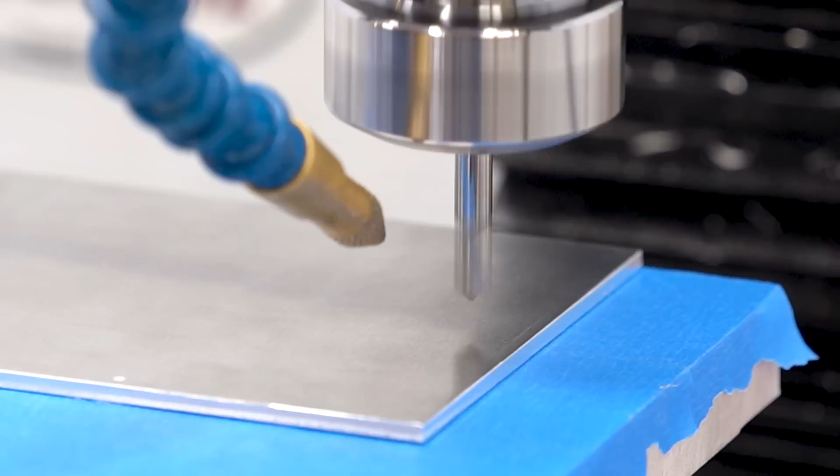This video is part of my series on putting a new spindle on my Grizzly G0704 mill. I think we're through most of the yak shaving. The spindle is running, it's time to make parts.

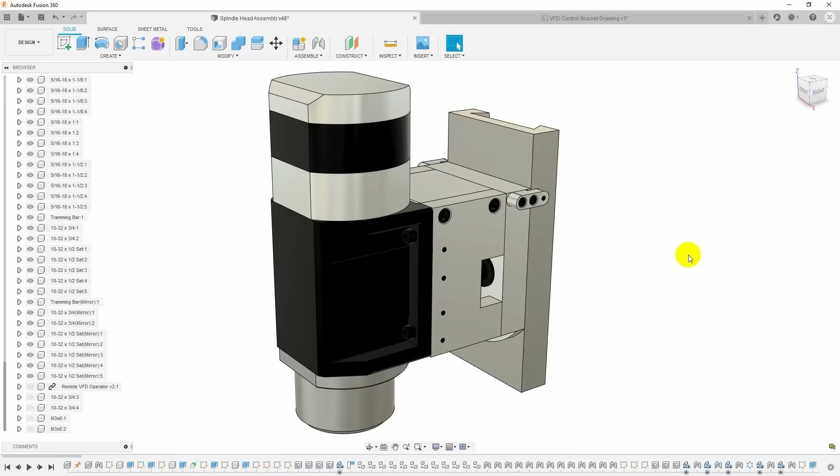Today I think we're going to start by making a bracket so that I can mount the remote VFD operator actually on the spindle instead of where it is right now, tucked under the handle of my toolbox. Now you've of course seen this model before. This is the new 3 horsepower spindle for the Grizzly mill and the mount that I machined to mount it onto the Z slide.

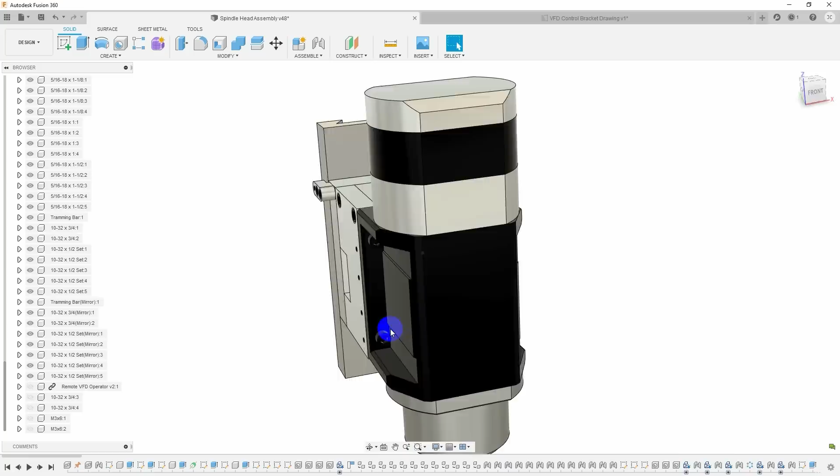You'll remember that I put some holes in the side here. In addition to the holes for the tramming bars, I just put 4 10-32 holes in each side of the mount, and I said that was for attaching things. Today we're going to make one of the things that attaches there.

Now the bottom screws I intend for attaching coolant mister attachments, because this isn't steel so we can't use a magnet, it's aluminum. But the top two I want to use to mount the operator for the VFD. So I've got that modeled.

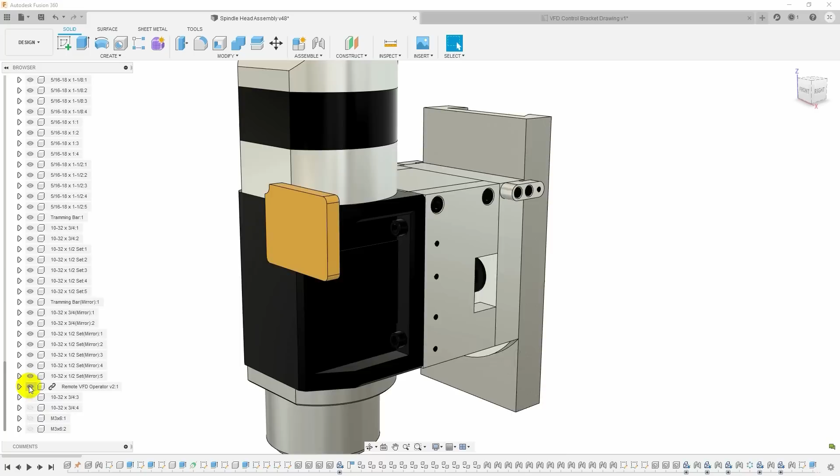It's not yellow, but I've got it yellow here so it's easy to see. This is about where I want it to sit. I want it to be on the front of the spindle where I can see it clearly. I could display the spindle load, or I have the start and stop buttons. I'll have the knob to control the speed if I'm doing it manually.

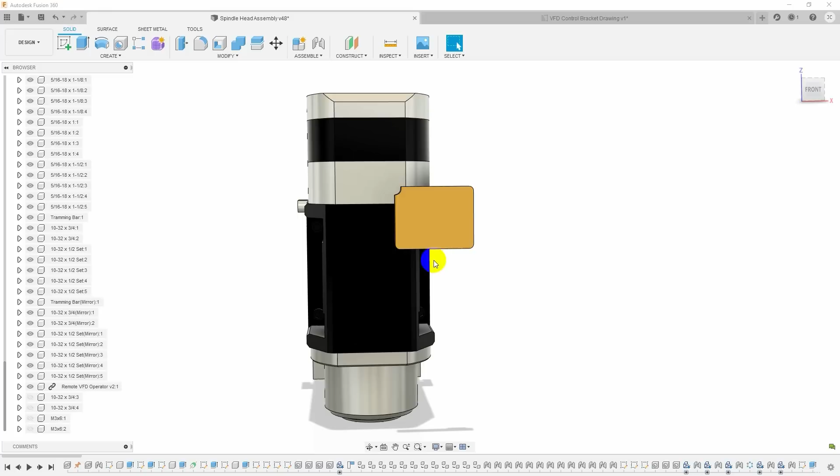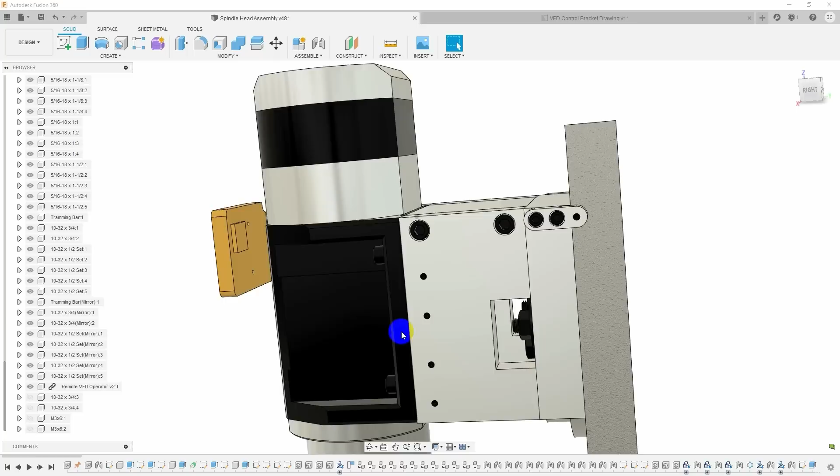So what I want to do is make a sheet metal bracket, and I've got that modeled in here. It's not going to be red, it's going to be aluminum, but again I've got this colored so that you can see it easily.

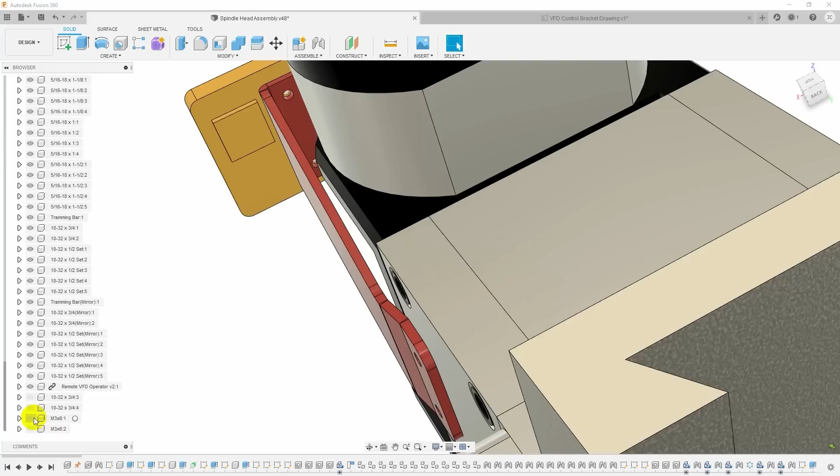So it's going to attach to the 2 screws here on the side, come forward, and then attach with a couple of M3 screws to the pre-existing holes in the back of the operator so that it can be mounted there. And down here, these are 10-32s.

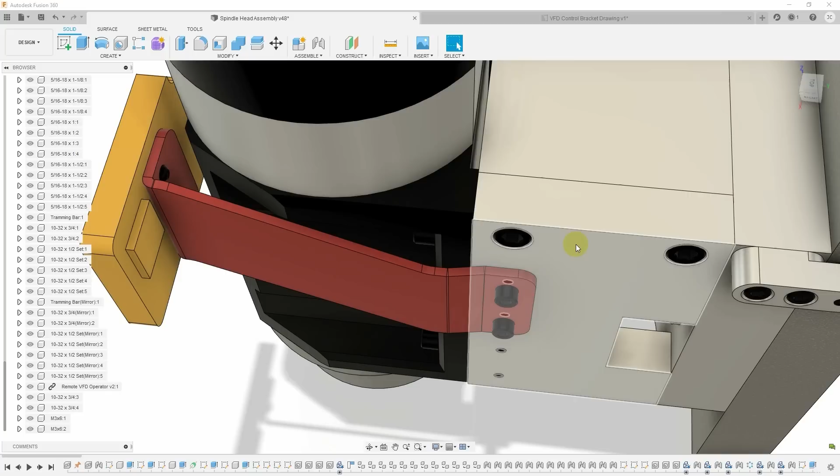So I modeled this up in Fusion as a sheet metal part. I'm not going to go into the details of that right now. If that's something you'd really like to see, how to model sheet metal parts in Fusion, let me know in the comments and I can take a look at that.

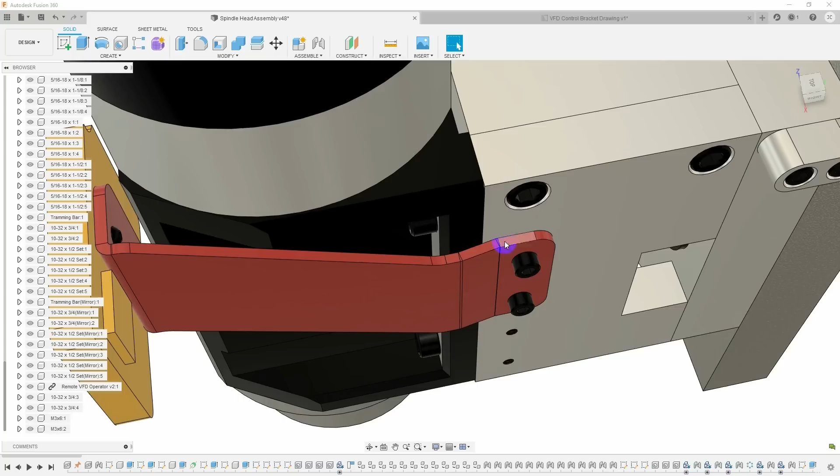But when you model this as a flange and then add on, here's a flange that comes outward at 10 degrees, and that's because there's a little bit of misalignment. The spindle is slightly wider than the back plate, so there's a little step there. So I put a little jog, came out 10 degrees, then bent back 10 degrees, came forward, and then bent 90 degrees. So in Fusion, you can just model it that way as a sheet metal part.

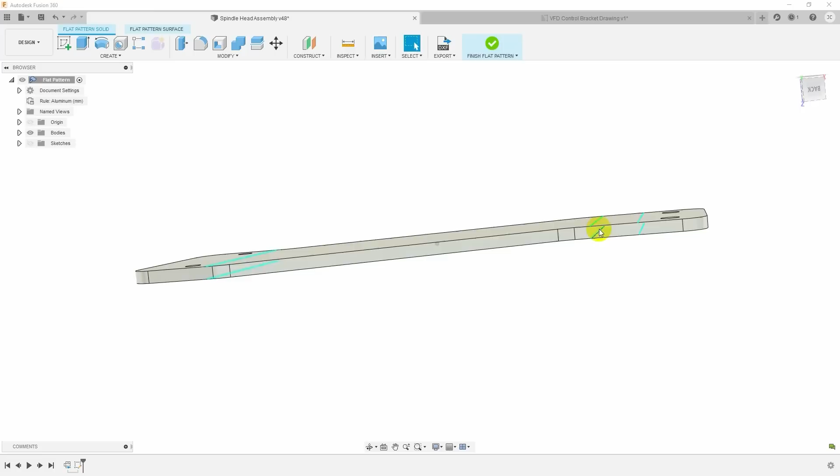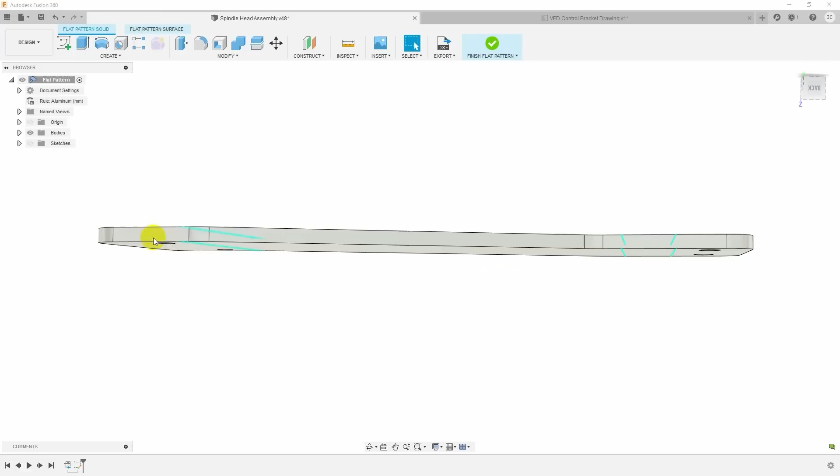And then you can come up here to your flat pattern, activate it, and look at a flat pattern of the part. It has a rule for the material you're using that has information about the bend radius and the way the material flows when you form it. So it can figure out what size the part needs to be and where the fold lines are so that you'll get the outcome you actually modeled. Sometimes you have to tune that, but in general for stuff like this that's not real fit-critical, the defaults are just fine. This is a 1/8 inch thick material, and we're just going to mill this out of a piece of sheet aluminum and then bend it.

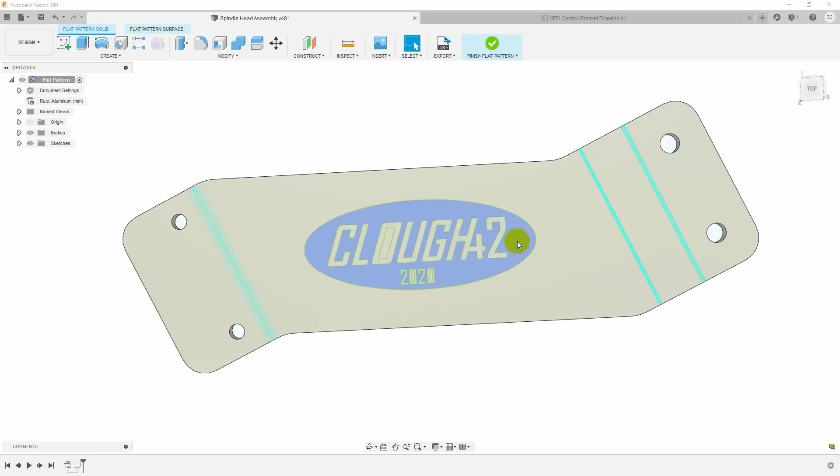As long as we're going to have this thing flat down in the mill so that we can mill around it, we might as well throw a sketch on here and engrave a logo on the side. This probably exceeds what you would consider a maker's mark or a touch mark, but this should be fun. We can try out the high-speed engraving and see how that goes with the new spindle as well.

So I think we just need to go out to the mill, slap a piece of sheet metal on it, and give it a try. Nothing left to do but to do it.

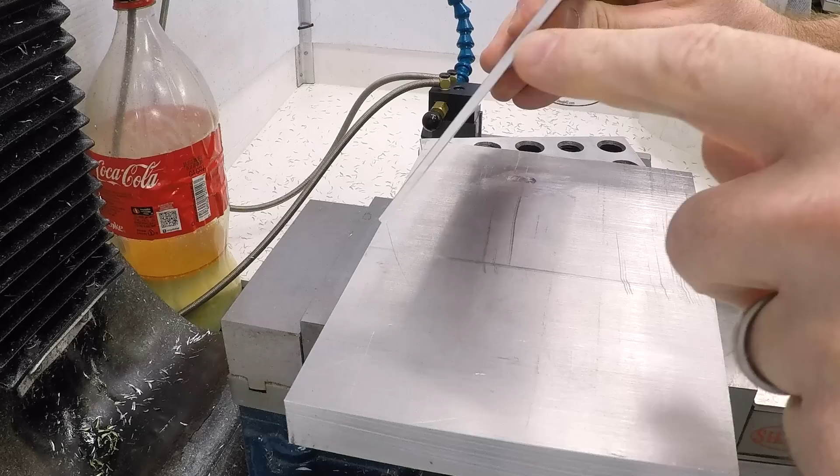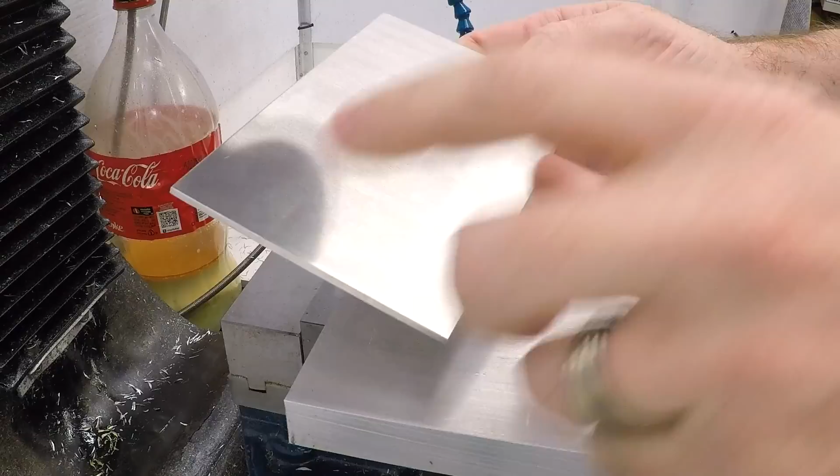This is the material we're going to use for the bracket. This is 1/8 inch thick 5052 aluminum. Normally on milling projects I'm using 6061, which is what this block in my vise is. But for the bracket I'm going to use 5052, because I need to be able to bend it.

6061, especially in this thickness and in a T6 temper, tends to crack or break when you bend it. 5052 actually bends a lot easier, so that's what we're going to use.

Now the downside of 5052 is that it tends to be very gummy when machining, and I've actually run into a bunch of trouble trying to make brackets out of this material.

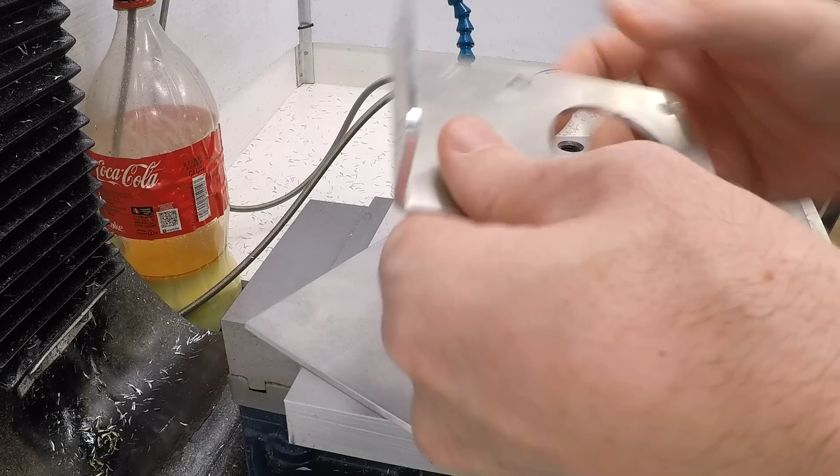This is a bracket I made that you may have seen on Instagram — I uploaded some photos when I made it. This is for mounting a fog buster on this machine, made using the same process I'm going to show here today, milling it out. But this 5052 is really gummy. Even using my favorite YG1 aluminum end mills, I had to take it in 4 depths of cut, because going deeper would just gum up and chip weld onto the cutter.

So we're going to take this nice and easy. Of course we have a much higher speed spindle, so it'll take less time to do multiple depths. But honestly I have no idea if the higher speed will make the gumming and chip welding worse or better. It's also a coated end mill from Lakeshore Carbide, so we'll see how that goes.

To hang on to this, I'm going to use super glue. There's not really a good way to clamp it, since I have to slot out around the bracket. I could try to grip it with the Talon jaws, but since I'm cutting completely through the part, there will be nothing left to grip unless I leave tabs — and with vise pressure on it, I'd need really big tabs to make that work. So I think super glue is the best way to go here.

So I'll lay down blue painter's tape on the part, then super glue the two together. This is something John Saunders showed over on NYC CNC a long time ago, and I've used it a handful of times and it works really well. Of course, you have to be able to peel your tape.

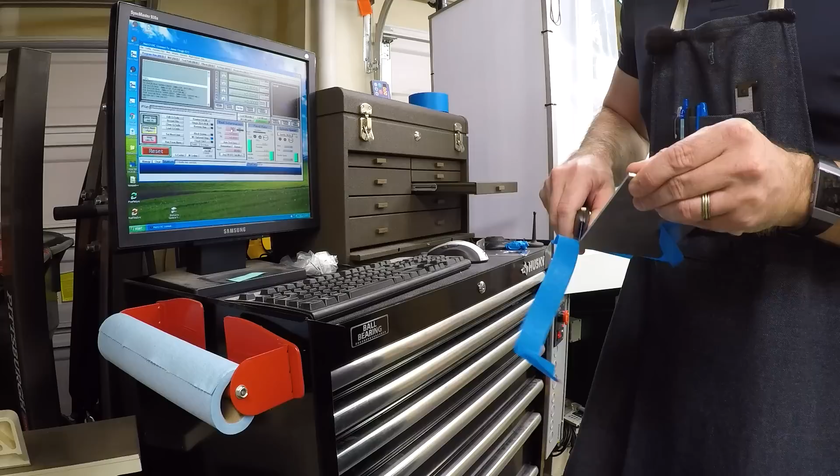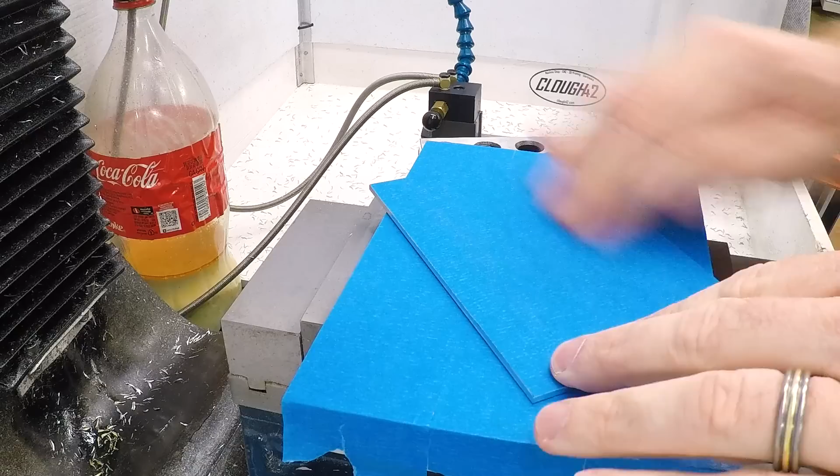Make sure this is burnished down good and tight. Then we'll stick this down with super glue right about the back edge of the vise, just to try to make sure we keep the part within the work envelope of this mill.

Now I'm using Loctite 414, just because it's worked well for me in the past, and because it's a little bit thicker than some of the other formulations I use for other jobs, like 420.

That should be plenty — I've never really had a problem with not getting enough. I always have too much, that's my problem.

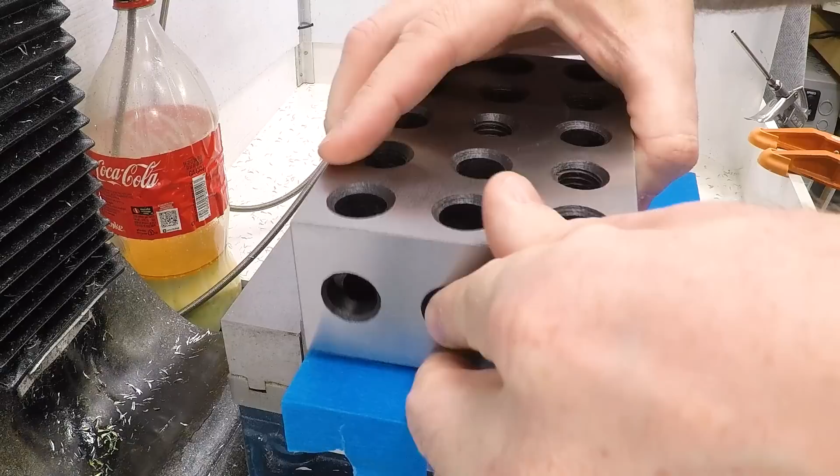Clamp that with a 246 block. And I've actually got a couple of Woodpeckers clamps here just to make sure this is nice and secure.

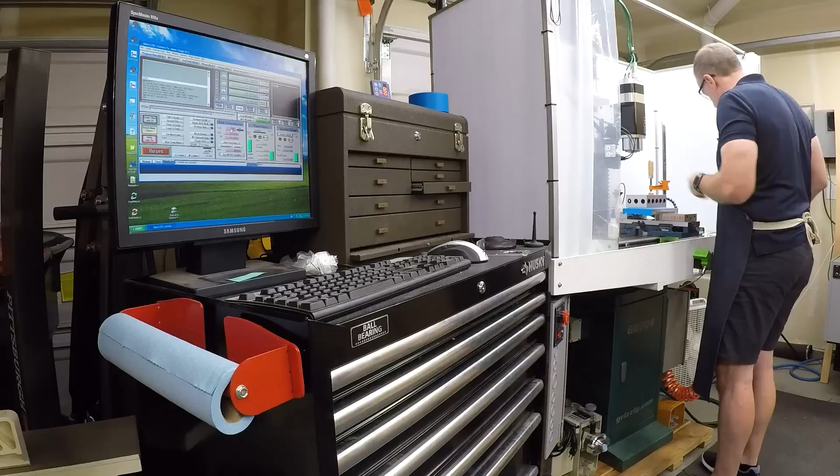We'll let that sit for a few minutes to make sure the super glue has grabbed. Okay, the glue has set and this is nice and solid. So we've got the aluminum plate with a layer of tape on the back, a layer of super glue, and a layer of tape on an aluminum platen. This should be ready for milling.

We just need to locate the top corner here. Let me grab the Haimer for that, and let's locate that corner.

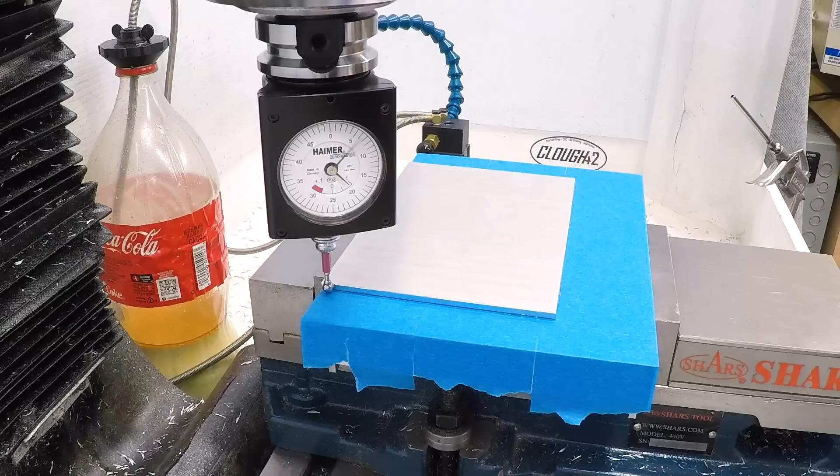Then just as a sanity check, I'm going to take this thing to zero with the MDI just to make sure everything's good. So G0, X0, Y0, Z0. And that looks just about right for tool 99.

Okay, first up, tool number 2, carbide spotting drill running at 6,000 RPM. Let me get the coolant set up here.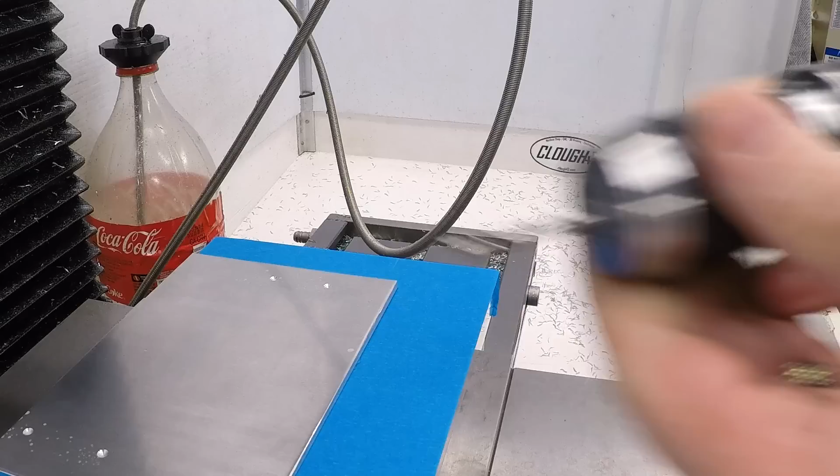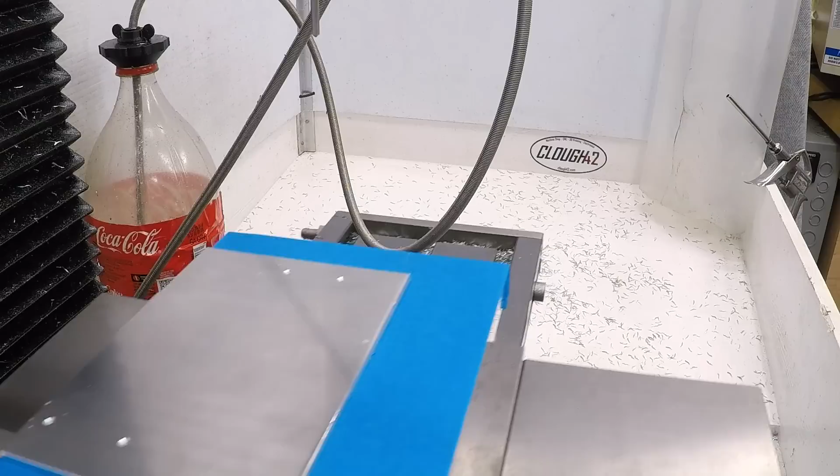Okay, the second tool is number 29 drill, running at 9,000 RPM. Next is a 1/8 inch end mill to bore out these holes.

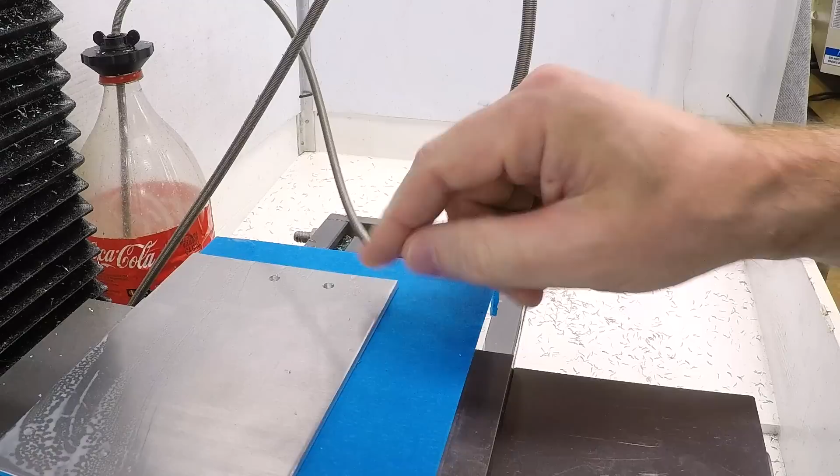And that looks perfect. I can see the drill point that went through the tape to the substrate, but around the sides I still see the blue tape. So we didn't go completely through the blue tape when we milled, which is what I planned — I went 1/1000th of an inch below the bottom of the part, which should be in the layers of tape and glue.

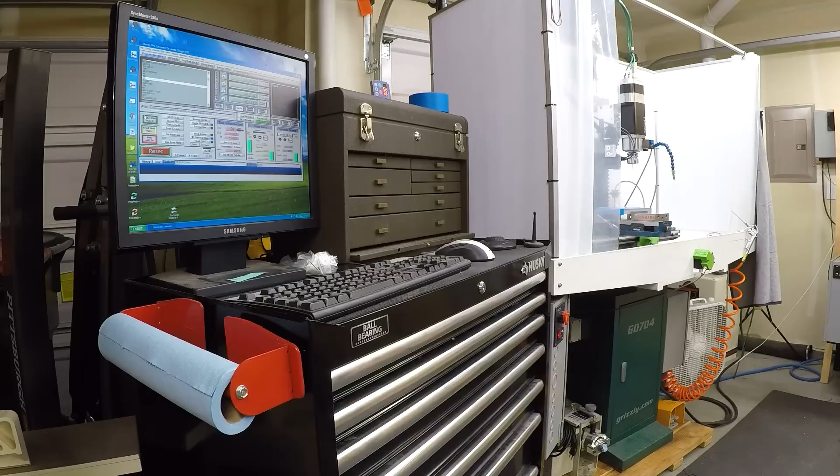I'm just checking everything, double checking it against my setup sheets, making sure everything looks right. Don't want to crash this thing badly on its inaugural run. And since everything's moving faster than it used to, I'm just trying to be as careful as I can.

Okay, the next tool is tool 15, a 3-flute 1/4 inch end mill. We're going to use that to contour out the sides — this is the main event.

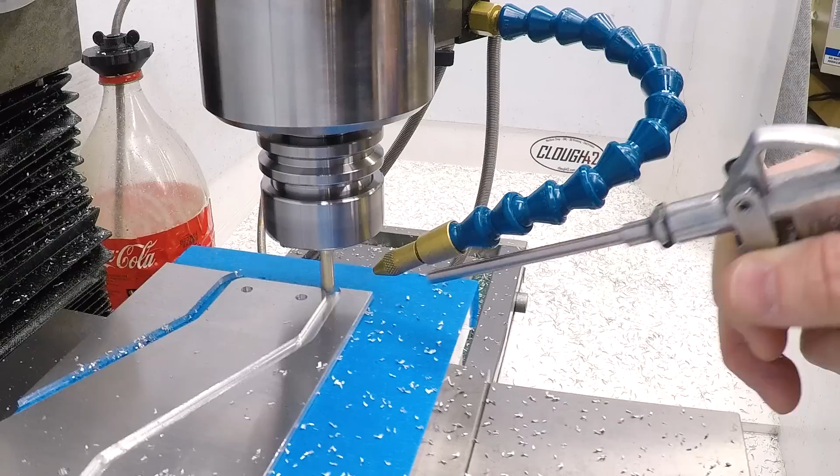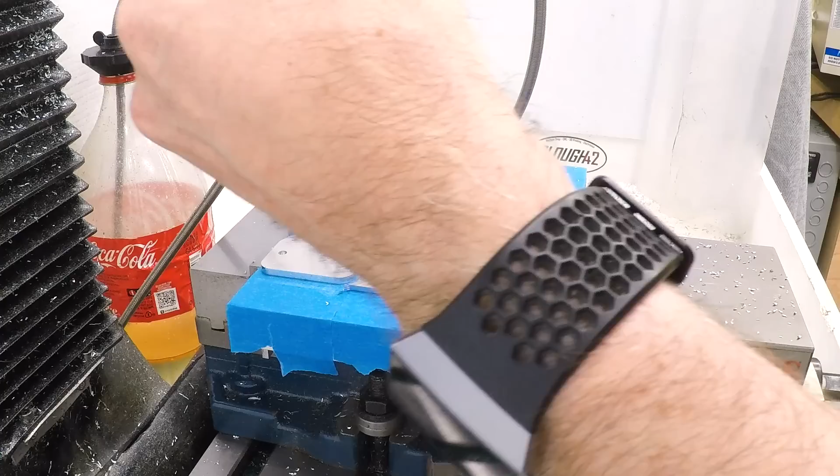Okay, I got a little bit scared there because as we got deep in the hole, I was hearing something. I think it was chip recutting, might have been a little bit of chatter. I'm not really sure. Slotting is always tricky, especially in 5052. And there's lots of blue tape ground up and into the side there. I think the coated end mill picked up a lot more of the blue tape than the polished end mill

Yeah, you can see there's quite a bit of tape and super glue residue on the cutter. It does come off just with the fingernail, so maybe that's just cosmetic. I'll take a look at this later under a microscope and make sure we're good.

Still shaking a little bit. The first cuts on a new machine, especially with an unfamiliar process. I'm used to the way this thing works, right? Switch on the coolant, switch on the spindle, and having this thing just be so silent and the coolant not on, it feels like I'm missing something. So I've got years of experience and it's all different now. But so far, so good.

Okay, the last tool here is tool 31. This is a carbide engraver from Lakeshore Carbide, 20-degree angle per side with a 20 thousandths ball. And we're just going to engrave 5 thou deep and try to put a logo on this thing, see how that turns out. Keep trying to turn on the coolant.

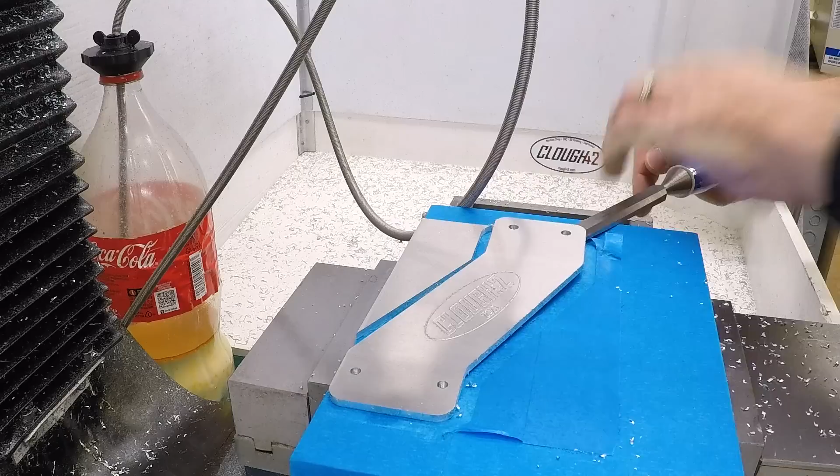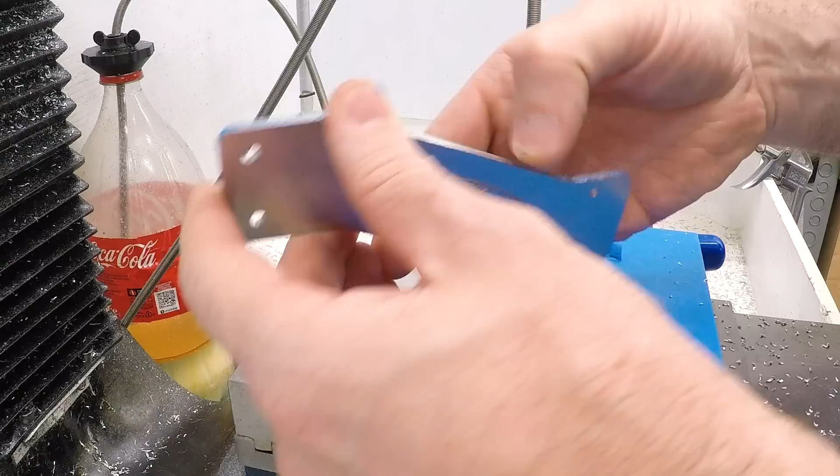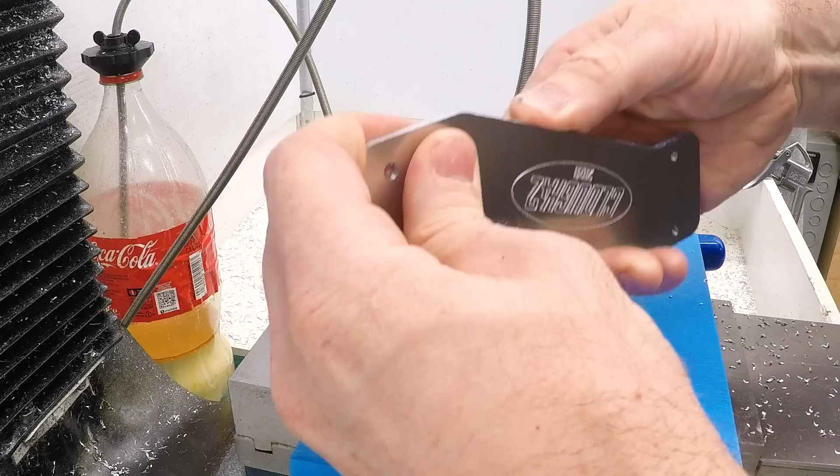There it is. I was trying to figure out if I got a bunch of chatter on the side, and it looks like not really. It looks like it's mostly just tape and super glue. It's just gummy, and then once it's off, it looks pretty clean. Okay, let me clean this up a little bit, and let's go bend it.

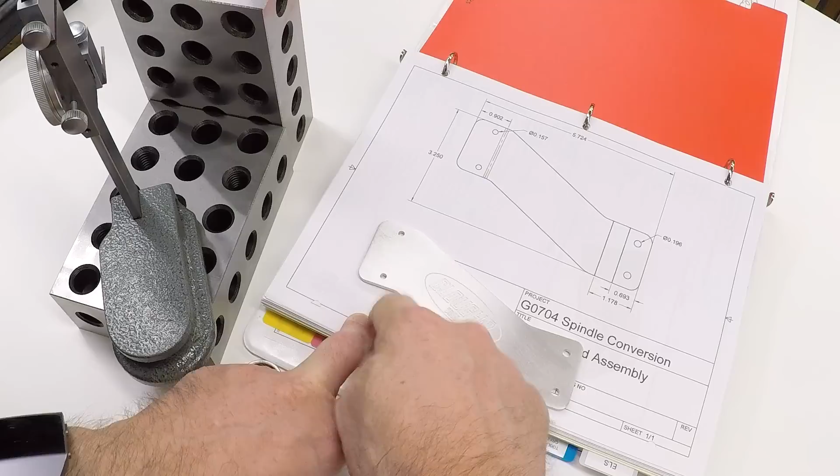Now I've got the diagram here showing where the bend lines need to be, and I need to mark those on the part. So let's start with this one. We need to go 902 from the end. Let's see, 8, 9. I need more range than that. Come on.

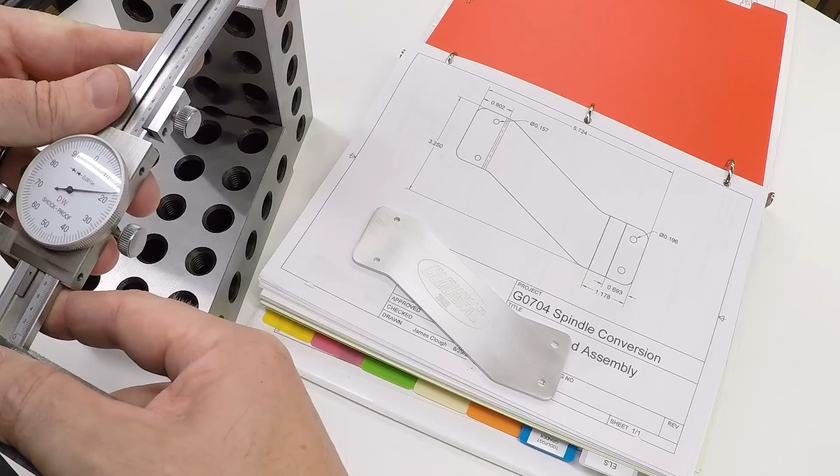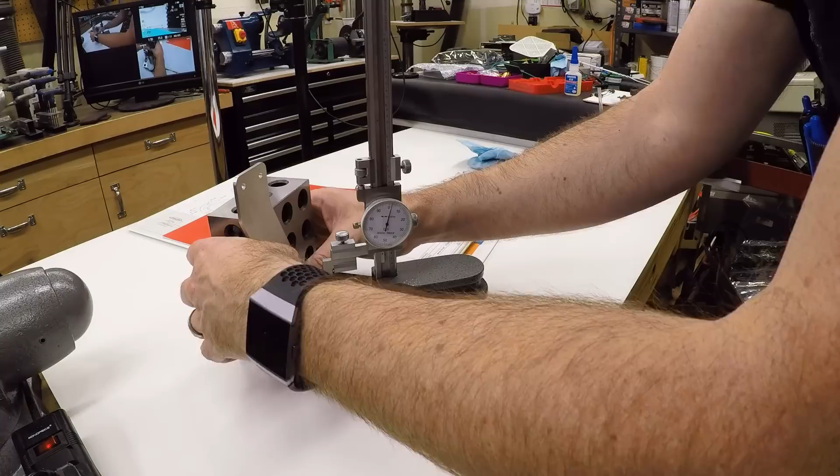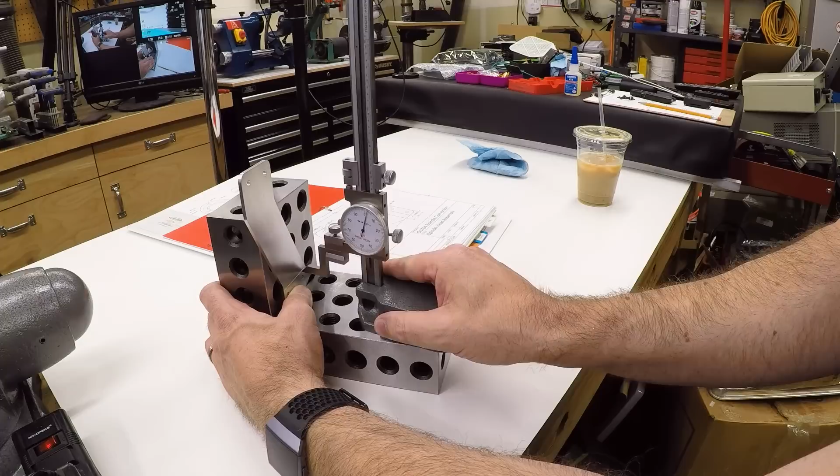And that's going to be bent over, so it needs to go on this side. Okay, so there's that line. Then the second line down here will also be on the back, 1.178.

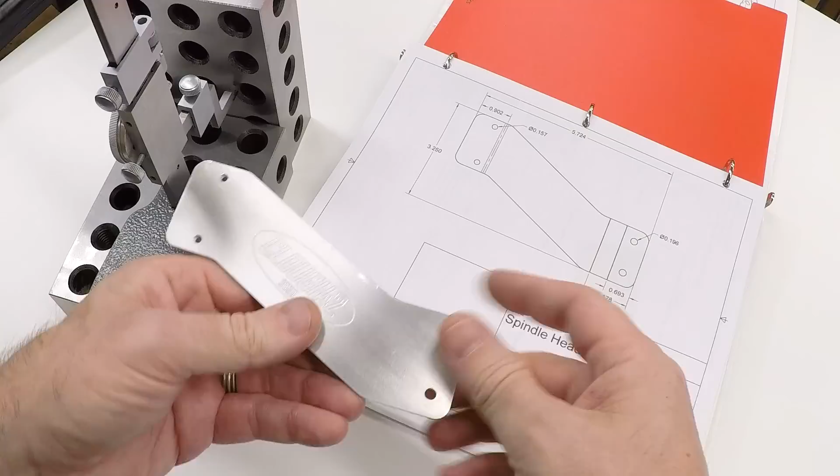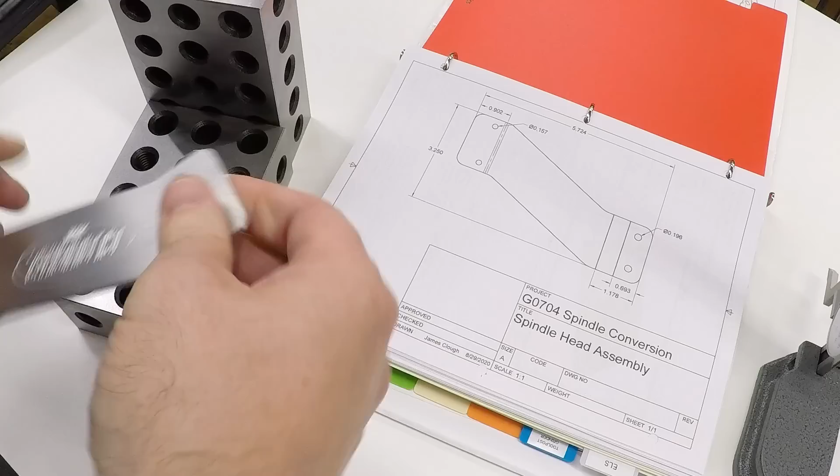Okay, and then the last one is on the front at 0.693. Okay, there are the marks. That's a slight jog out, slight jog back in, and then a 90-degree bend up at the other end.

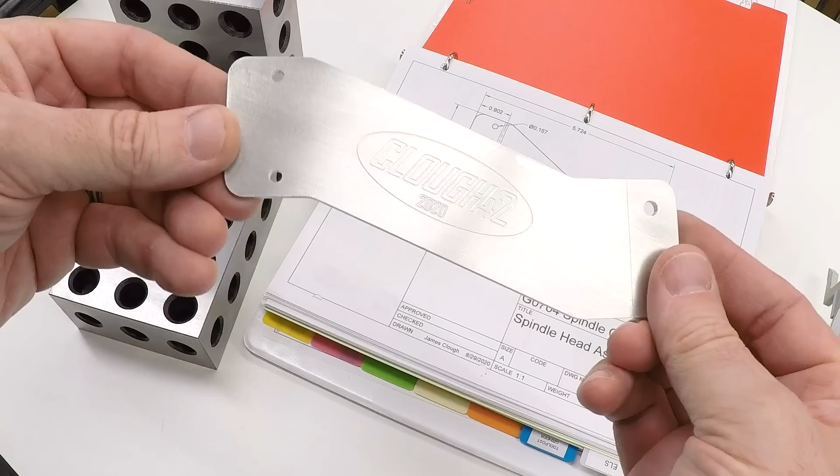And see how the engraving turned out. Once I hit this, I just hit it with some red Scotch-Brite, just by hand, buffed it up along the length of the part, gives it kind of a brushed look, and it cleaned up that engraving beautifully. Very happy with that. Okay, let me get set up to do the bending.

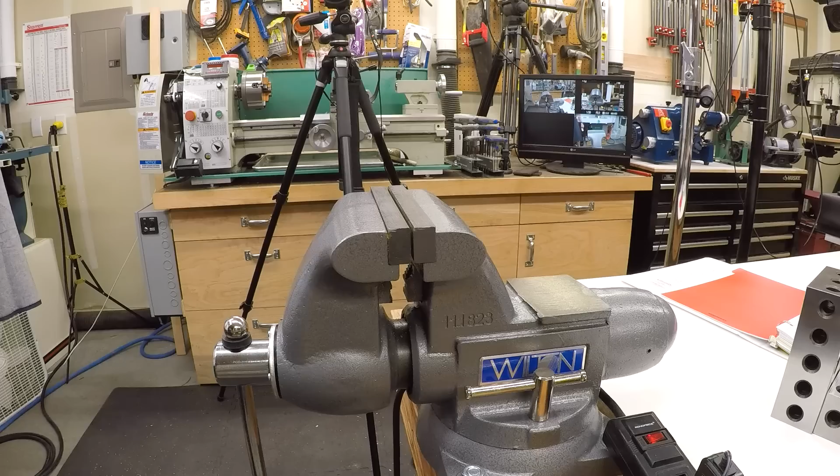Okay, to do the bending, I'm going to actually do it right here in my Wilton vise. This is a 6.5-inch model. And I have a set of bending jaws, bending brake jaws for the vise. And these are just magnetic, and they attach. I'll put a link to these down in the description. This is the 6-inch version. They make all different sizes for all different vises.

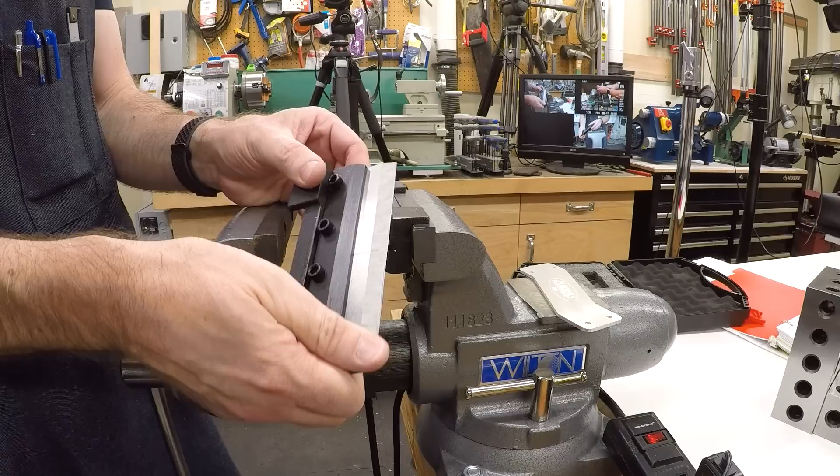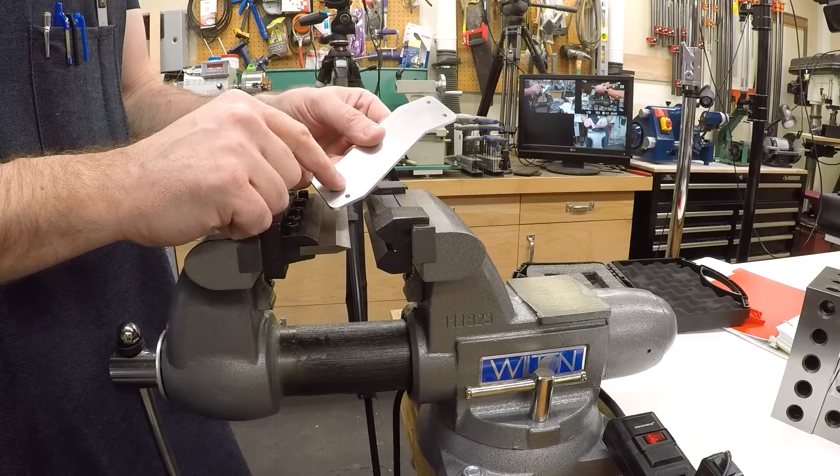And then this is the tool. It's actually a very, very sharp tool, creates very sharp bends. I'll drop that in. And then all we have to do to make a bend, let's start with the 90-degree one, is just line up the score line that I made with this jaw. And in fact, you can kind of feel it, so it's easy to line up.

And then just close the vise to make the bend. Now I'm not sure exactly how this is going to behave because of the angle here. It looks like I did keep my logo back far enough it's not going to get marred. And just give it a squeeze. I don't want to overbend it. I'm going to risk underbending it slightly.

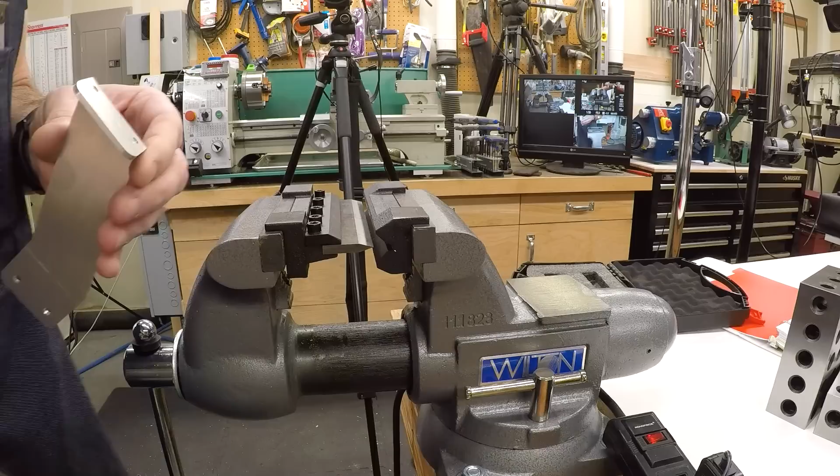Check it with a 1-2-3 block, and we're a little bit short of 90 still. And now we're past 90. That, fortunately, is very easy to fix. All you need is a little piece of shim and a hammer. And you can open it up just a touch. We're still just a little bit past 90.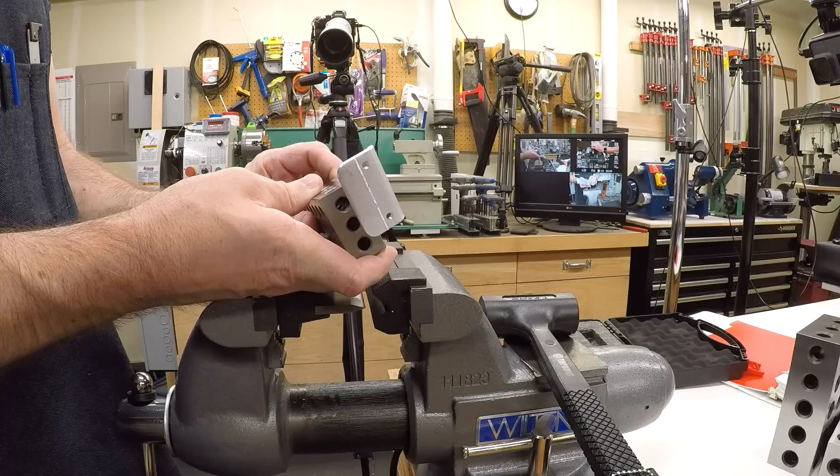Clear the bend? Not really. Let's just give it a little tweak and see where we get. That doesn't look too bad. Actually, I'm going to say that's just about right. So that is the bending complete, and you can see it does mar up a little bit. We've got some marks.

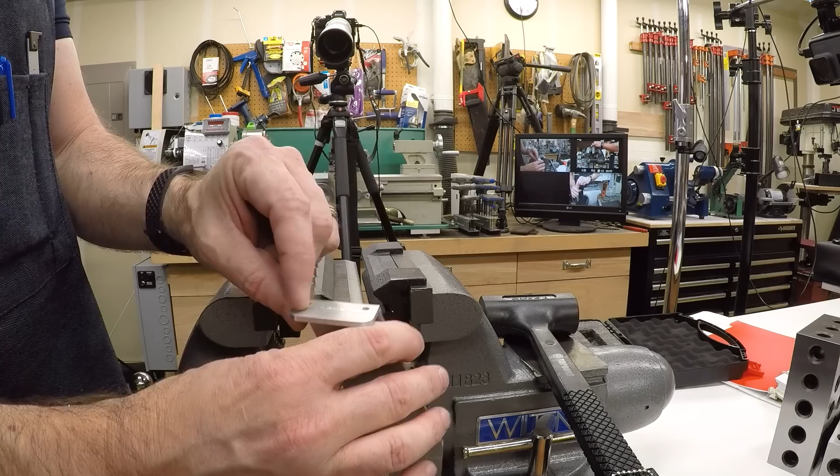Now I'll have to say the first bracket that I bent using these jaws bent a lot harder, just took a ton more force. This one actually went pretty easily, and part of that is because I actually modified this vise, and if you check out my Instagram you can see photos of the modification. I actually put a roller bearing in here, a thrust bearing, roller thrust bearing, that actually makes it take very, very little force to drive this in. So for metal bending it's great.

As a modification for the vise in general, the jury's still out, because not only does it make it much easier to clamp, it also makes it much easier to release. Even when you've got something clamped down nice and tight, which takes very little force, you can just bump the handle and it'll release. So jury's still out. So far I've been enjoying it, but in the long run we'll see if I really enjoy having the bearing in there.

Well, let's take this over to the mill and mount the controller. That was the whole point of this exercise.

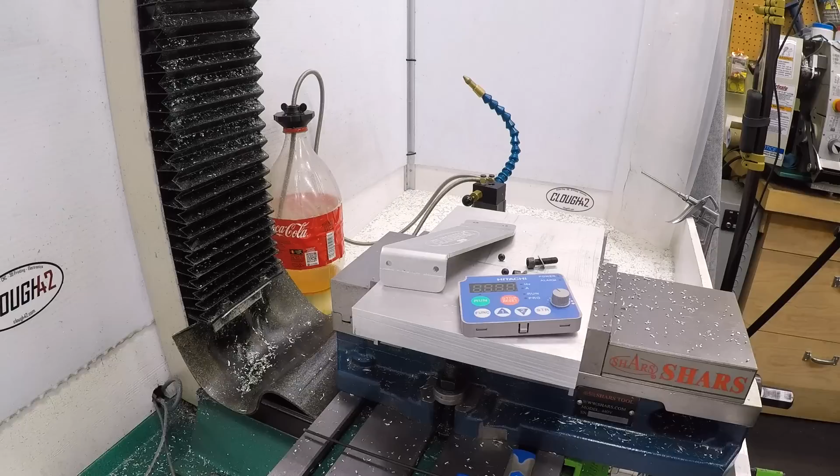Okay, we got the bracket, and I've got the remote operator here for the VFD, and this just mounts right on the front with a couple of M3 screws. I made these holes just a little bit big, so they're like 4 millimeters, maybe 4.2, I don't remember exactly, so I'd have a little bit of adjustability, though I don't believe that's going to be needed.

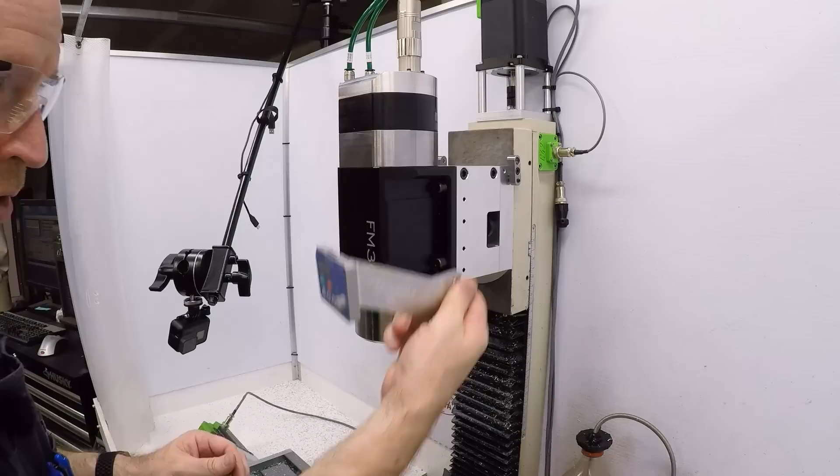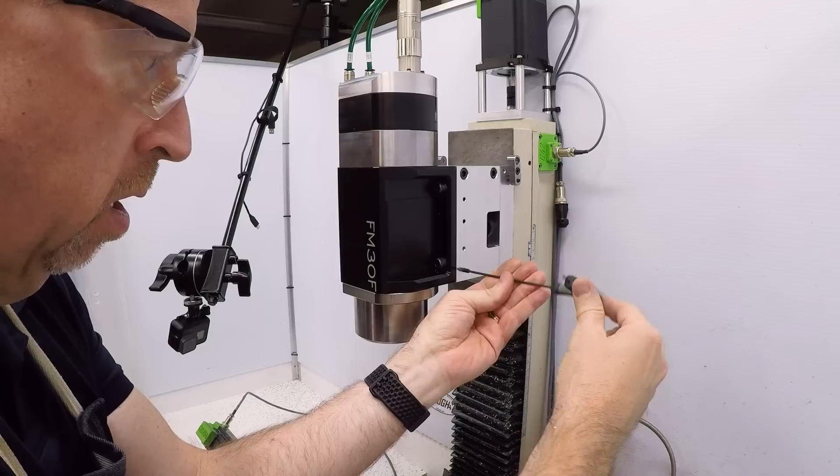And then this whole thing just needs to go up here on the side of the mill. Let me take out the set screws I had in here just as plugs to keep trash out of the threads. And I've got some 10-32 screws with washers, and these holes should actually be quite tight because I intended for these to register closely, and I knew that since I used the CNC for all these holes, they would line up for sure. Oh yeah.

Oh, and that is beautiful. I mean, there's a little bit of flex, which is what you would expect with a piece of sheet metal like that. And ultimately, I won't be running it based on this very much, but maybe a little bit longer bracket would have been a little bit better, just to give it more support, because some of that flex is plastic. Anyway, I think that will work.

Let me grab the cable. And I'm most certainly going to bang the cameras around here. Okay. Which way is the connector? That way.

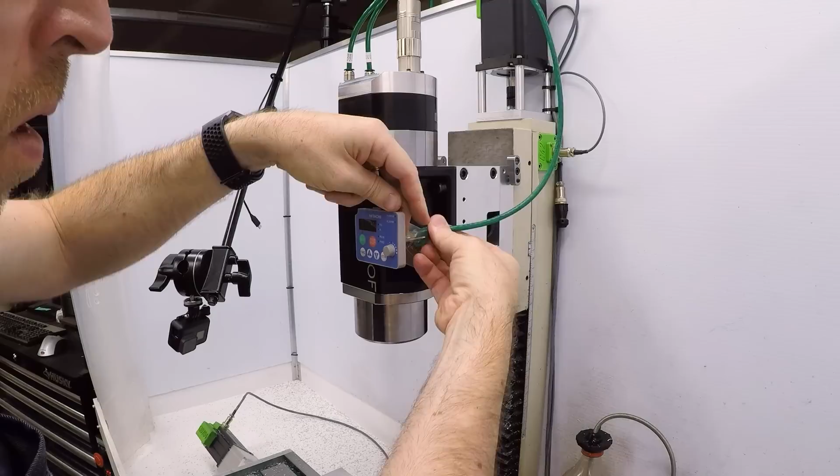And we have an error, and the error is because the VFD tripped because it lost contact with the control panel. So I can reset that. We have control of the speed, and we can run. And stop. Beautiful, that's really nice.

And I screwed up, I put it in the bottom holes. The bottom holes are for coolant. I wanted it in the top holes because I also wanted to keep the logo here clear. Okay, one moment while I fix the obvious thing I did wrong. And also while I murder that fly.

And there we go, nice and high up. It's high enough it's going to be out of any of the mayhem down here on the table. I've got my speed control, though ultimately I'm not going to need this. I can do all the programming, anything I need to do, from here.

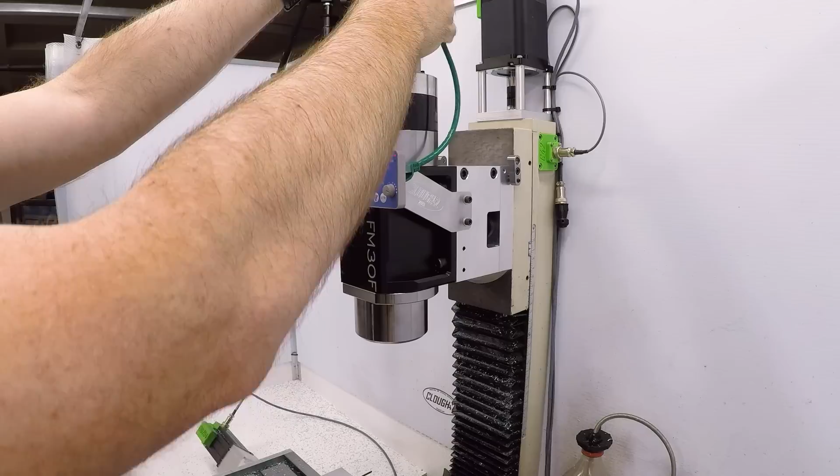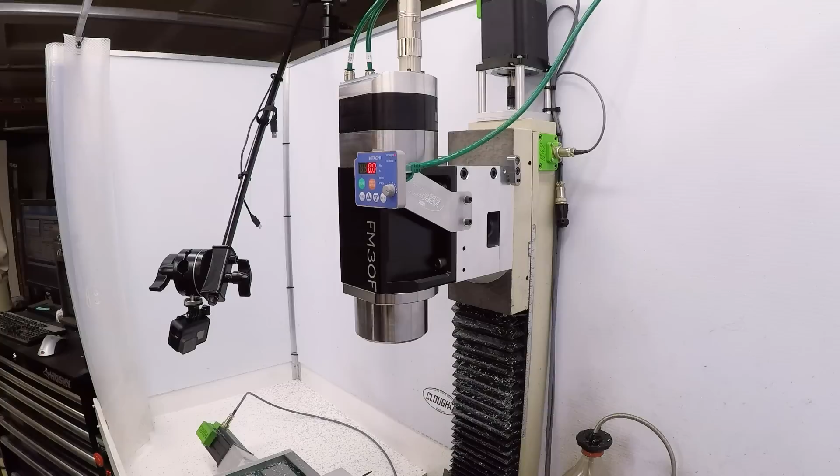And that is beautiful. Need to zip tie the cables up, and you can see I got a green cable for this, which matches my green line, air lines, and my green spindle cable. So I think aesthetically this is going to work as well.

Well, that is the first part from this new spindle, and I have to say this thing moves so fast compared to what I'm used to that it is a little bit terrifying, because I'm just constantly aware. I've run into problems with CNC before where, you know, I start getting chip welding and then bam, the cutter breaks. And with this spindle, that is going to happen about 6 times faster. So I'm still a little bit apprehensive. We'll get some experience with it, and I'm sure I will start to feel more comfortable with it.